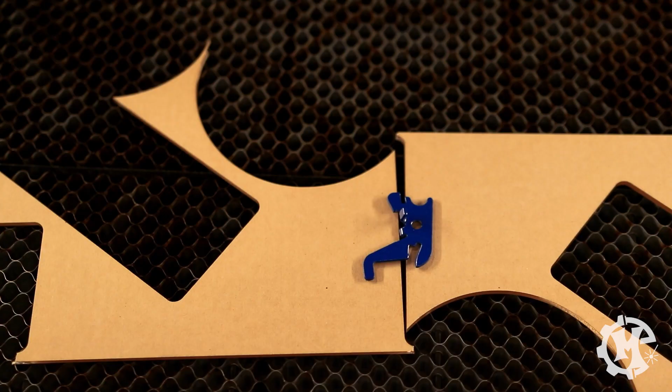All right, this is how I set up the bracket to try to get an image of just this hook piece, using acrylic underneath that's got a solid color to help distinguish the blue from that grid. So let's go over to the software and see if we can pick it up. I have the camera up for the maker.

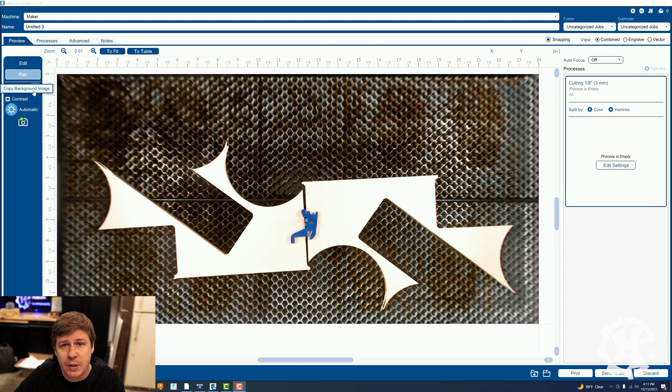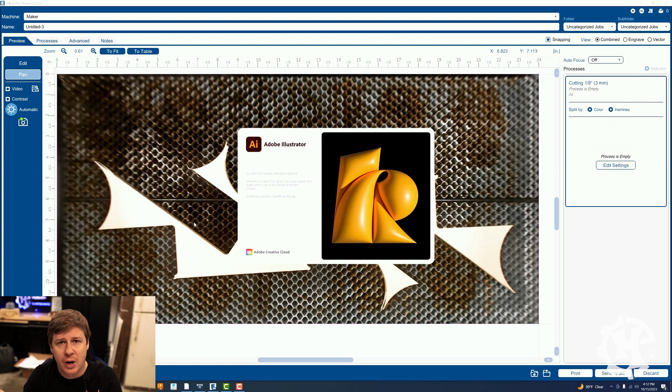So what I'm going to do here is go over to my left, copy the background image, and then open Adobe Illustrator. This is going to take a second. Essentially what I'm going to do is import this image into Illustrator and then trace it. I'll trace it first and then do a test cut to make sure it closely matches and will work, on a scrap piece of material. If it works, I'll take that design and add it to the bracket I've designed in SolidWorks Maker. If that works, then we'll be able to actually print something.

All right, here I am in Illustrator. I'm going to Control V to paste my image and lock that layer. Then I'm going to start a new layer and change my trace color. I'm going to make it red so it'll stand out a little bit better.

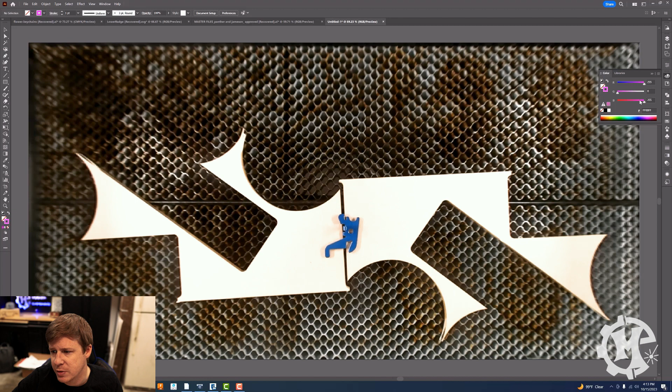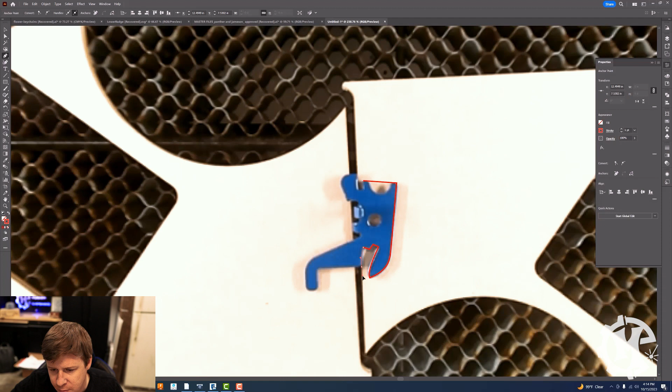And then I'm going to just trace the outline. Quick trace here—that angle might not have been good, so let's redo that. Okay, so I have this one. Let me clean that line up a little bit. Come back down here. It might be kind of hard to see some of these lines—frankly, it's hard for me to see some of these lines.

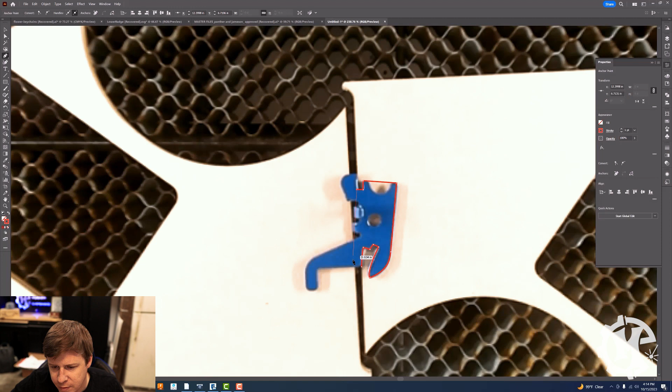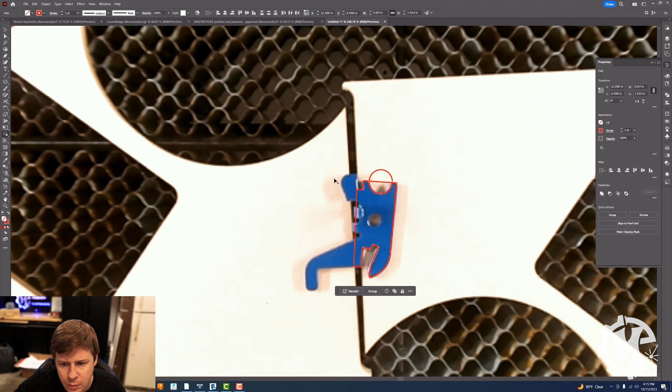And this will be like our first little prototype, if you will. I'll add a little circle here, like so, and then use the shape builder tool. Okay, I want to get rid of that.

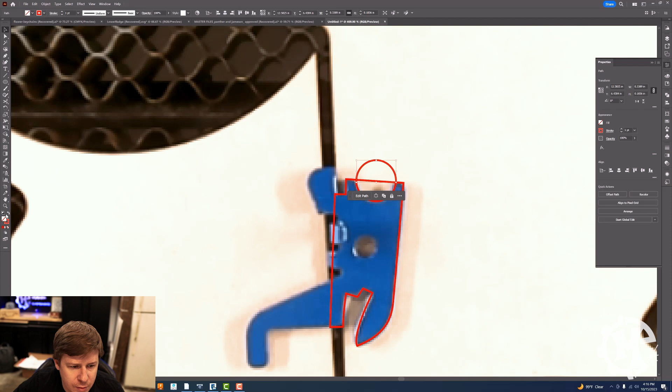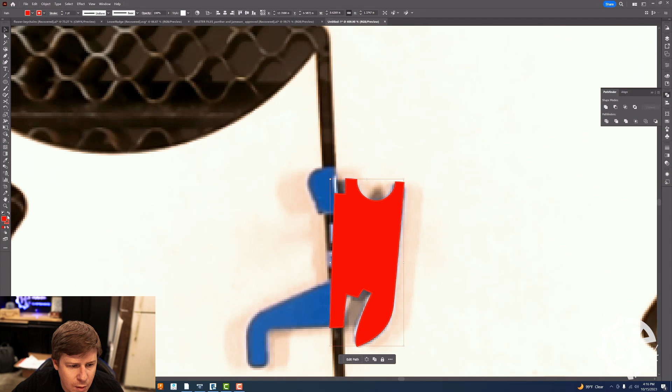So we'll do this—oh, there we go, there goes that piece. Let's do that and see if this works. There we go, not exactly what I meant to do, but it works. Okay, give this a little curve, little curve, little curve.

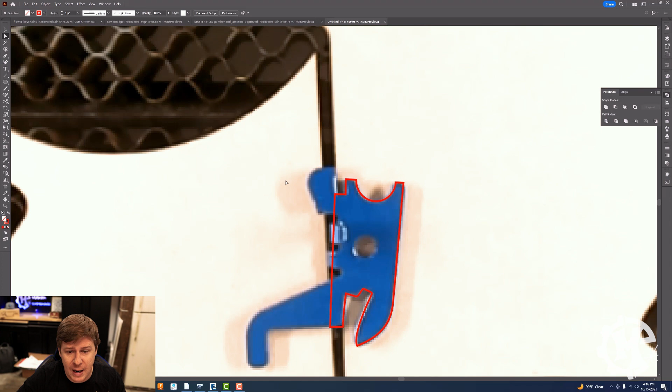So what I'm going to do is send this back over to the laser, and we're going to cut this out of a piece of scrap. I'm going to grab a piece of scrap material, and then I will see you over at the laser.

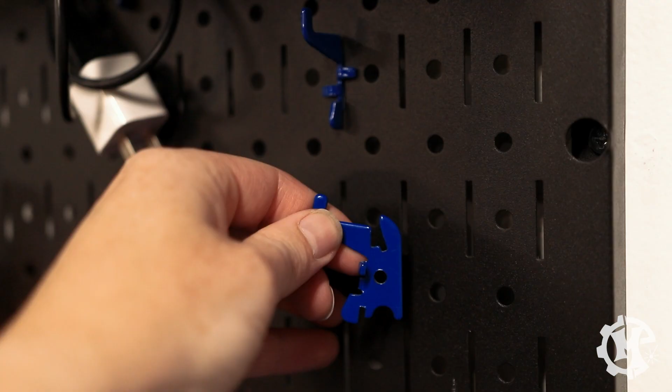So here's the initial one. That one slides in like so, and it doesn't really move. Now, my acrylic one goes in, it'll rest on that back side. The thing I didn't do in the prototype is I didn't bring this down far enough, but it locks enough that it'll work. So now I'm going to make a second prototype where I extend that and see if that works better, and if so, we'll incorporate it.

In the process of prototyping, I made 3 different versions. There's version 1, which didn't have the little hook down. There was version 2 that had the hook down, but I had too much space in between, so it didn't sit very well. And then version 3, which is really small, has the hook to help keep it in place, but I shrunk the distance between the two areas to give it a better grip.

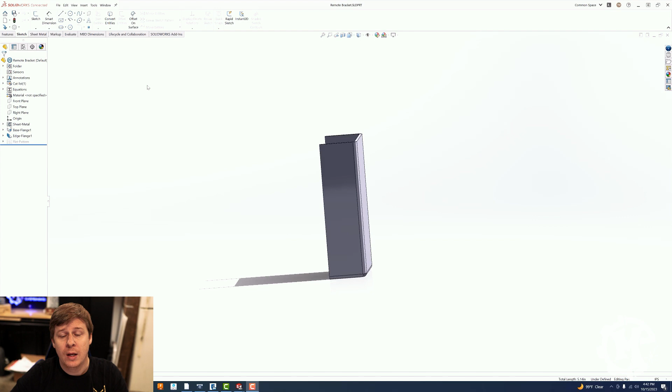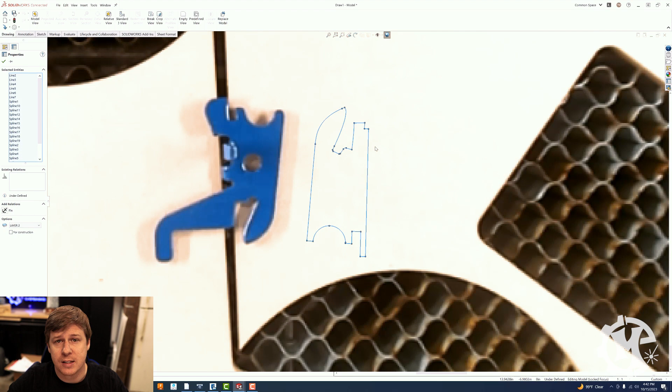So if you jump over to SolidWorks here where I have the bracket, so right here is the bracket itself. The intent of this is that the remote will sit in here. I'm going to make a new sketch, and I've already saved out the bracket design, or this hook design, as a DXF and imported it into SolidWorks, so I can copy it and then paste it into my design.

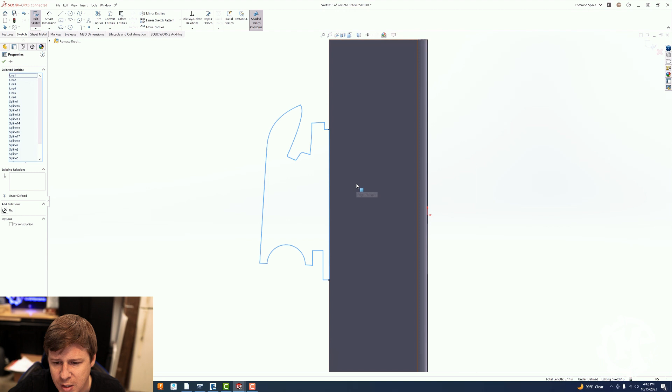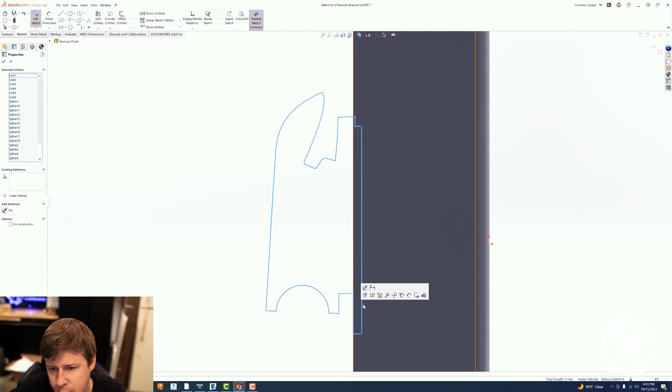So here's the hook, and what I'm going to do is try to line them up. I want to figure out a good spot for it. About 3/4 of the way up is probably sufficient. Then what I want to do here is make sure that they overlap, which they do. I'm actually going to make them overlap from this front part here, because I think that will probably be the best spot, I hope. Yeah, we'll try this and see if it works.

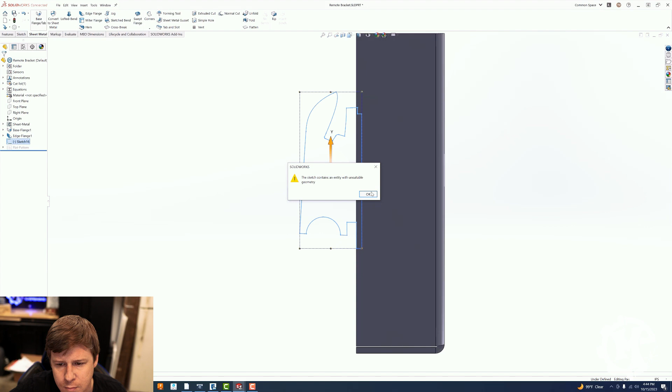So here, just making sure it overlaps. Normally I would constrain this, but the shape is kind of odd, so it's a little difficult to do. So I'm just going to exit, make it a sheet metal flange. Come on. It has something with unstable geometry. So what's the unstable geometry?

The hard part about bringing something like this over is you typically get something like that. I'll be back in a minute, I'll try to figure out what's going on.

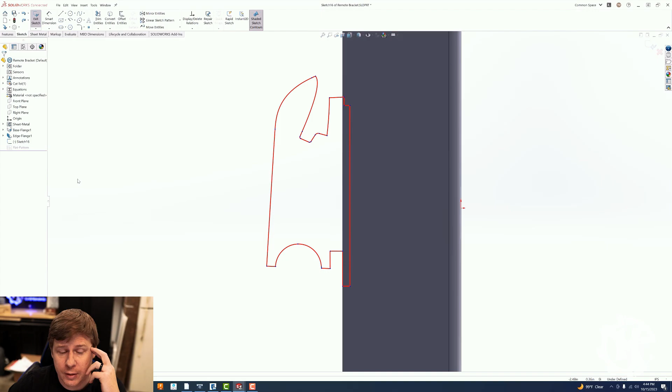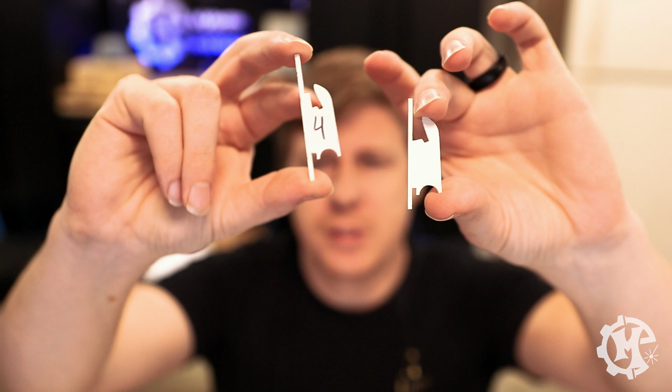After a few different iterations off camera, just because it took a little while, I did make a version 5. So this was version 4 - you can see that I eliminated this little step. Now, this still isn't perfect, but it will work for what I need to do. It's still a little bit loose at the top, but I don't have a lot of time left to figure it out, so I'm going to work with this one and apply it to the design.

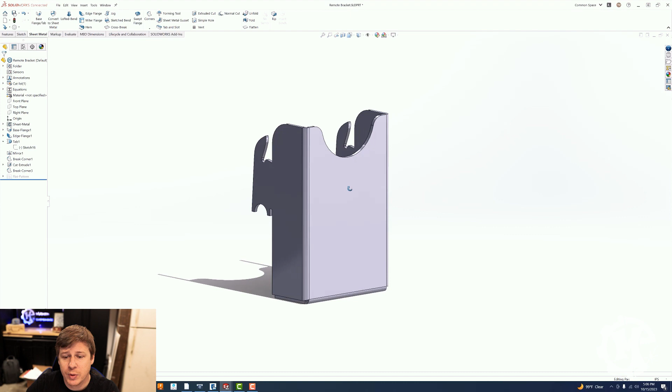You can see here in SolidWorks that I applied that hook to both sides of my bracket. I gave it a little bit of a design flair just to make it so it's not just like a flat rectangle. We're going to take this and we're going to go to my drawing.

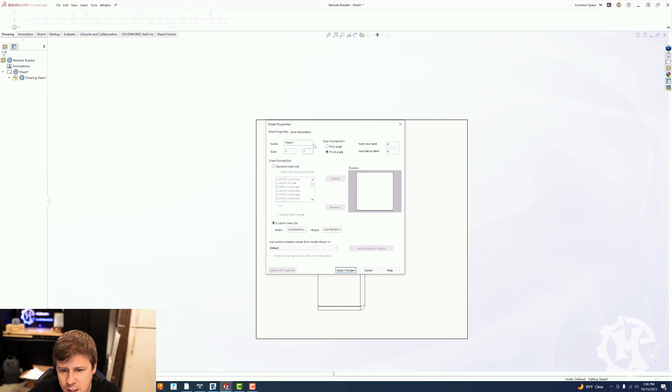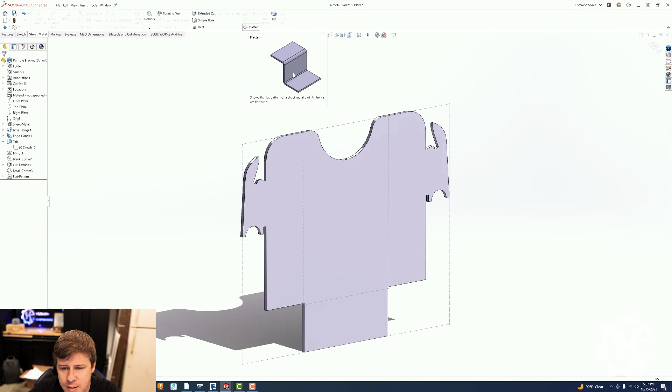Now I might have to make the sheet a little bit bigger. We'll make it a 1:1 scale. The size is going to be, we'll do 12 by 12, just so we have the real estate here. Then for the drawings, I'm going to delete this view, go back to my bracket, and I'm going to flatten it, so flattening it just makes it a single flat layer, nothing's bent yet.

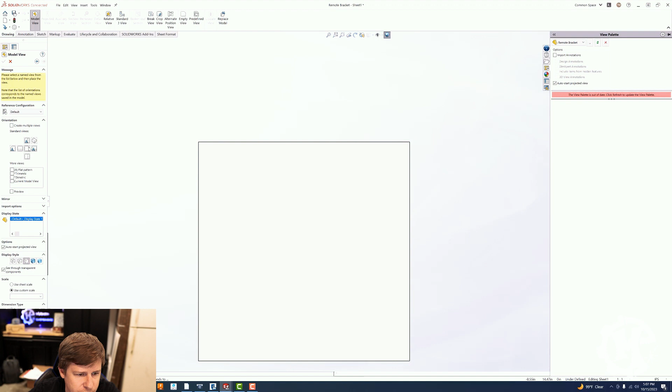If I go back to my drawing and I import the view, I really didn't need to delete the previous view, but a little late now. We will get, if I can find the right one, there we go. So this is the design. I'm going to make it 1:1 by using the, well, it should be 1:1. There we go.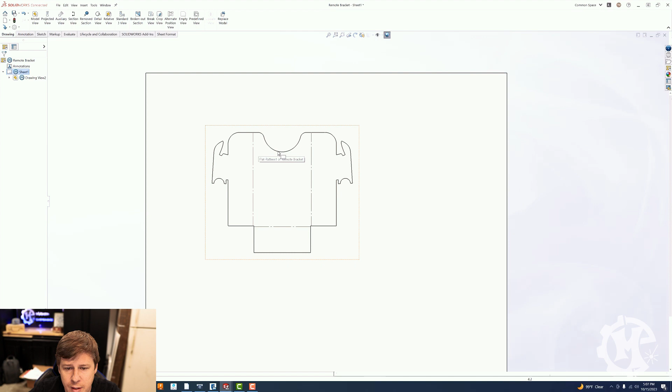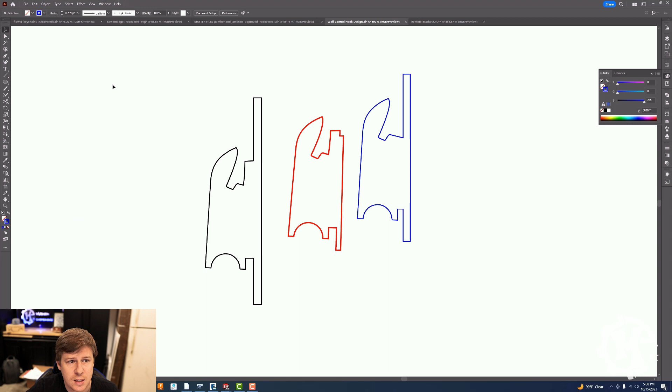The dashed lines I'm going to keep in here, you'll see why here in a moment, but essentially those are my bend lines. So we are going to save this as a PDF. All right, so I'm going to save this as a PDF, then I'm going to take that PDF and open it in Illustrator, and that will give me my design.

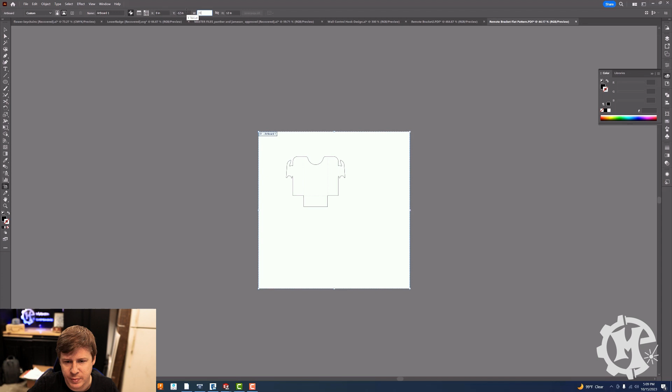So what I want to do here is make my artboard the size of my bed, just because that's the way I like to do things. I'm going to change those dashed lines to a different color.

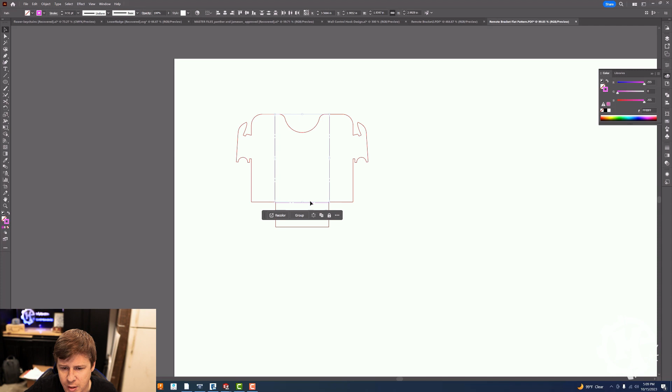Make those, I'll make them blue. And then the exterior one, I will make red. Whoops, don't know why that ended up pink. Guess I selected the wrong color. There we go. So this is going to be my bracket.

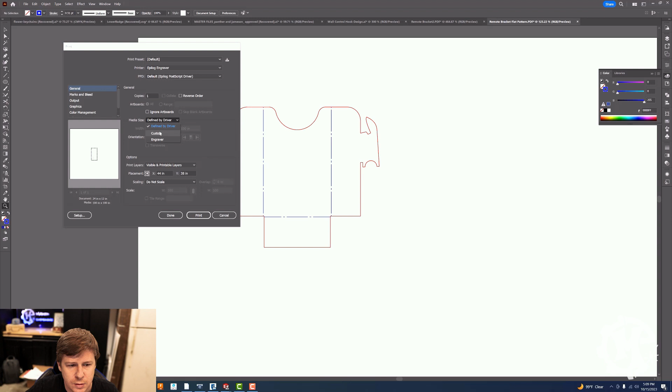I'm going to vector score the blue so I know where to bend, and I'm going to vector cut the red. So we're going to print this. I'm going to use a piece of blue material, see if this works okay. I'm going to put this in the laser. So here's my bracket, put it onto my material.

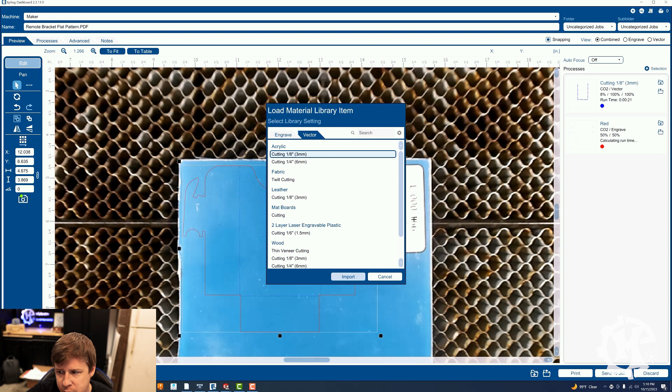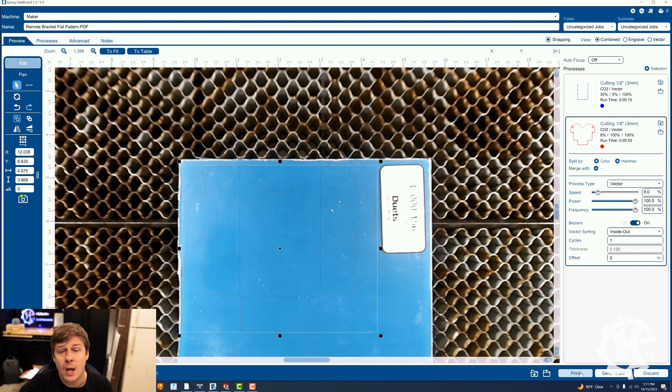Like so. The blue, I'm going to do a vector score, so I'm going to choose a very high speed for this, so I'm going to do like 30. The power I'm going to do at maybe 5, just because I don't want it to go through, obviously. The red, I will do 8 speed, 100 power, and 100% frequency. This is on the Fusion Maker, that's a 30-watt laser. And then we will print it and hope I did this correctly.

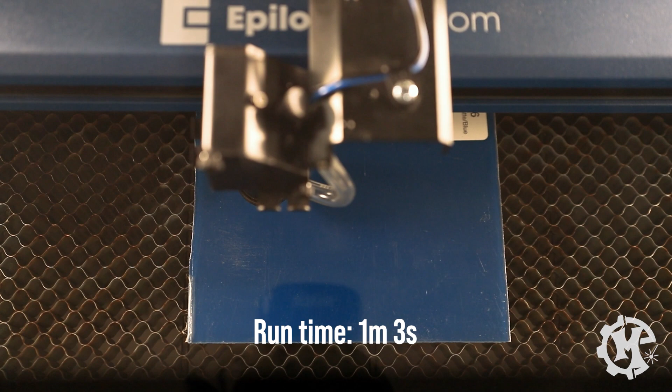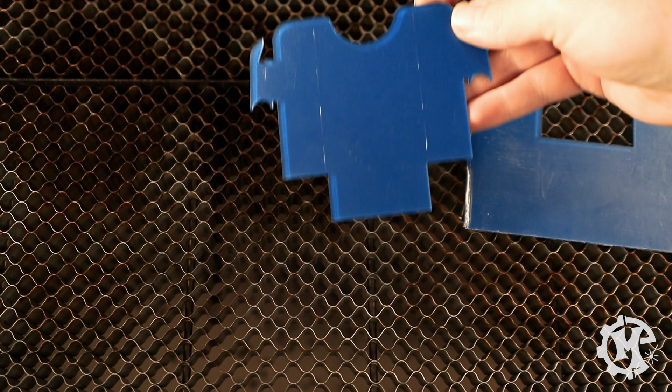I just machined the flat pattern bracket. So this is going to get heat bent into that three-dimensional shape. So I have the score lines here for where to bend. Let's go over to the heat bar and I'll show you what to do.

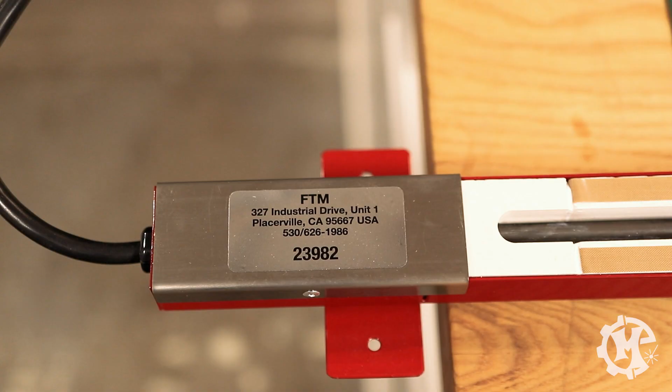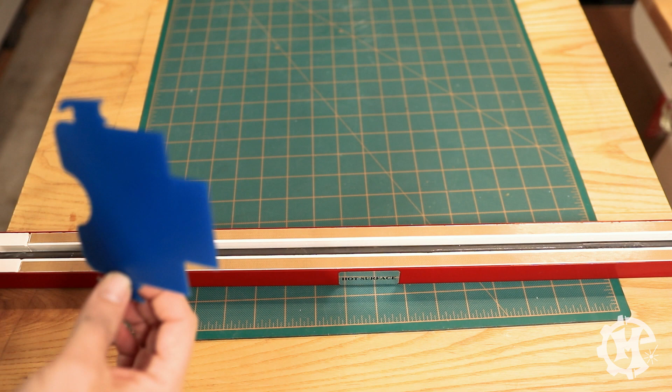Here is my heat bar. This is the FTM, I think it's the FTM 24. I'll leave a link to it in the description, but I bought it straight from the manufacturer. So far it's been pretty good. So what we'll do is sit the acrylic over top of this. The only thing I don't like about this heat bar is it doesn't have an on-off switch - it's basically plug it in or don't plug it in.

So we will sit it on top of there. Now I'm going to hold it a little bit, and then once it gets hot enough, we'll be able to bend it. Keep in mind I still have the plastic coating on here - I may need to take that off next time. Before I get too far, let me grab a board. This will work - I'm going to use it as a straight edge, essentially.

Once it gets hot enough, you'll be able to feel it bend. Now with thin plastics, it's going to be hard to bend, and hard to tell whether it's just bending because it's thin or because it's hot enough. It doesn't feel hot enough, so I am hovering it over the element. I'm not sticking it on top here, just because I want to see what happens first.

My plan is to do the two long sides first and then do the short side last. This is going to take a little while, so we might just jump to when it is hot enough to bend. All right, I think that might be hot enough. So what we'll do here is come over here - I'm going to use the straight edge of this acrylic, line it up with that score line, like so.

Don't think it's hot enough yet. Keep going. By using this acrylic as a straight edge, it'll make sure that I'm bending it evenly across the whole thing and I won't get a distortion I'm not looking for. It does take a little bit, so be patient - don't try to rush it. All right, I think it might be hot enough now, so let's try this again.

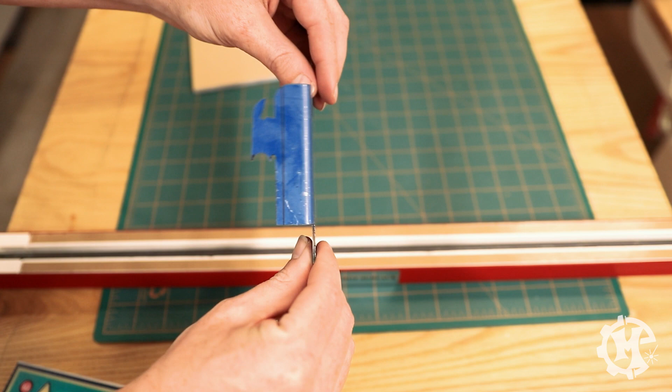Just trying to bend it evenly. Once you bend it, you have to let it sit to cool down for a second. So there's bend number 1. I probably need to bend it a little bit more, so I'm going to let it sit here, then apply that pressure and over bend it a little bit, then let it cool down.

Now we go to the other side. Just take your time. I can tell the heat bar is getting up to temperature. Alright, now that's pretty good, so we'll bend it. I'm sandwiching it between the acrylic, so it might be hard to see, but alright, there's 2 of them.

I'm going to test fit this real quick off camera to see if it works. Good news is it works. So we'll do this last piece here. This one I'm going to have to bend with the table because I'm not going to be able to fit this thicker piece of acrylic.

Bend it, like so. Try to hold it down where it needs to be held. And then we're going to let it cool off for a second, so just let it sit there.

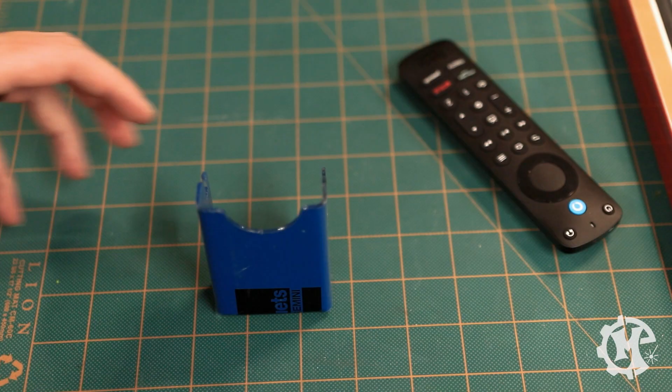Alright, here is the bracket. If I spin it around, you can see the bent bottom, the bent sides, the little hooks I made. We're going to peel off this plastic, which arguably I probably should have done before I got this far. There we go, there's the inside. Now let's do the outside.

For those that want to know, I think this is about 16th inch thick acrylic. It's actually two-toned, silver or clear on one side, blue on the other. That's actually one of those engravable two-tone plastics. I just didn't use it for that purpose. So this should fit. Now the real test is to test it on the wall control.

Alright, we're going to try right here. Just slide it in, slide it down. It does hold pretty well, actually. And then, real test. Ta-da! It does work. It's a little sloppy side to side, but I had to make it that wide because of the spacing of the brackets here.

But if I take it out, I can take this off. I can move it around, say up or over, wherever I want to put it. And then it's locked in place. Drop the remote in. That is the custom bracket.